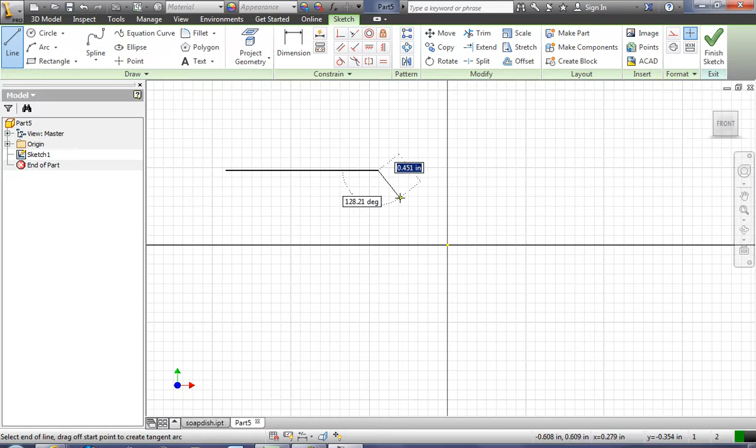So I'm going to draw a line that will simulate a golf club. That kind of looks like a golf club. Looks like a hockey stick too, but that's good enough for now. So there's my shape. Okay, I'm now going to finish my sketch, and in order to do a sweep, we have to have another profile that's perpendicular or at least intersecting this shape that would sweep along the curve.

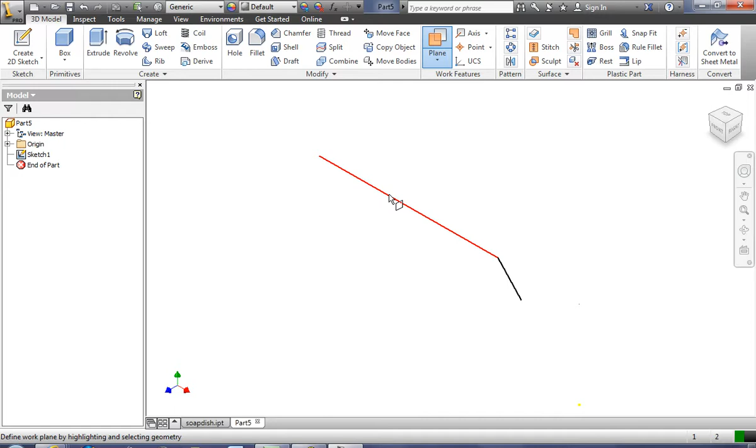What I'm going to do is make a new plane by using what's called a tangent work plane. We did it before when we made the plane off the soap dish to do the emboss. I want to select the line, and I want to select the endpoint. And what that does is it gives me a perpendicular plane to that sketch.

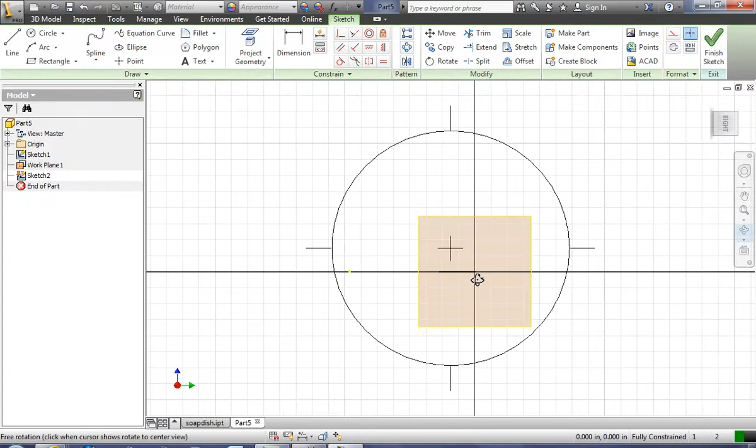I'm now going to make a new sketch on this plane. Remember, you've got to select the outside edge of the plane indicator. I'll make a new sketch. It turns to show me the sketch. Now I'm going to turn it sideways just a little bit so you can see that I've got the two different sketches. Here's the first one I made, and now I'm going to make a profile.

The profile is going to be the shape of a triangle. The reason we're using a triangle is because we want the edge to be sharp so that there's the least amount of contact with the ridge and the soap, so that it doesn't get all messed up when there's water at the bottom of that cavity.

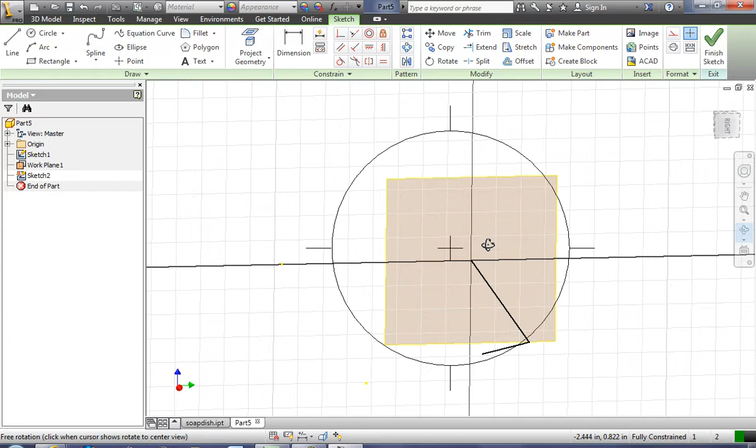All right, let's use the line tool, and I'm going to go ahead and make a triangle here. I'm going to start at the center, and make a triangle. Now this is 1/8 of an inch. These lines, these light lines, are 1/8 of an inch. So we'll go ahead and make it a little bit bigger than that. Maybe 3/16.

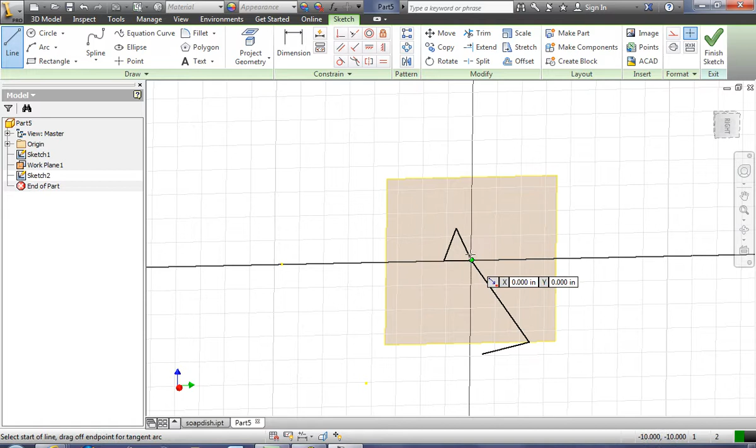There we go. Now I didn't dimension it, but I'm going to make this symmetrical by drawing a line from the midpoint of the bottom. There's the midpoint. Okay.

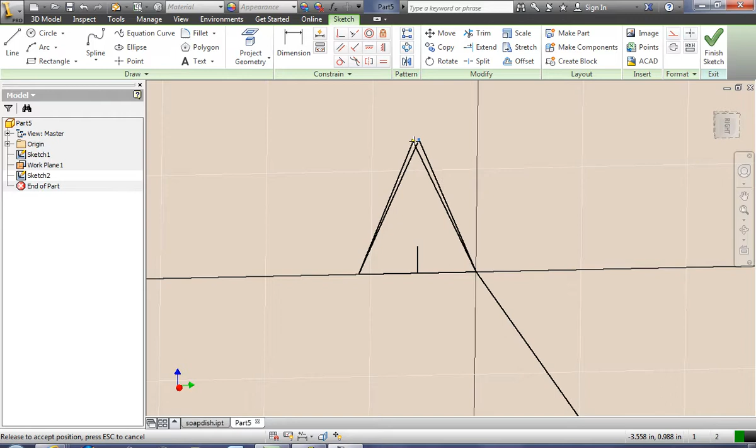Now that I'm out of the line tool, I'm going to go ahead and grab the corner or the apex of this place where the lines come together. And because it's not dimensioned, I can move it freely, and you can see that it will line up with that line. I want to be right in the middle, and that means that because that line is drawn from the middle, that is an isosceles triangle that is symmetrical, these distances are equal.

Okay, I can delete that line. I'll go ahead and finish my sketch. And now you can see what I have is an enclosed area and a sketch that I can then sweep that profile over.

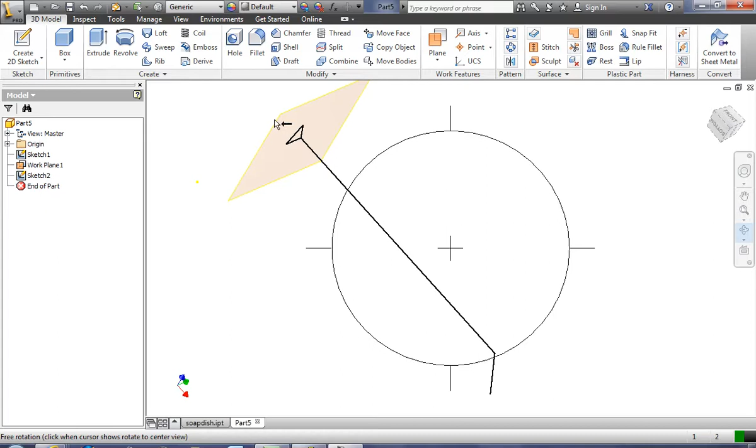And we do that by selecting the sweep tool. Now, if you hover the mouse over sweep, it will tell you and show you a video of how to do this. Let's go ahead and watch it. There's my path, there's my profile, there's my sweep. You have a perpendicular plane that intersects the path. Okay, you can see how that works.

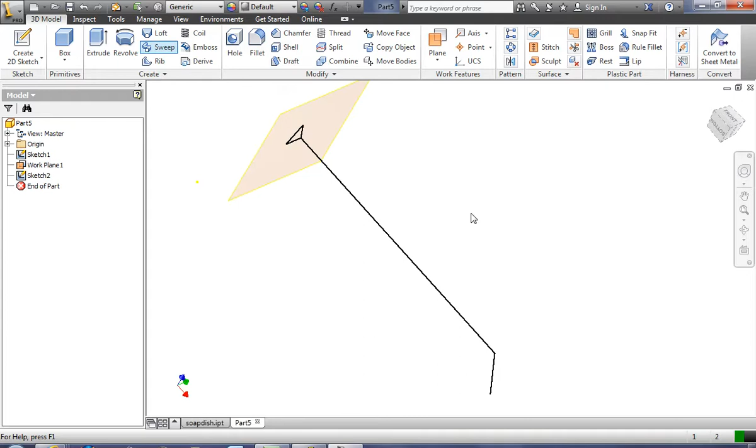All right, so we're going to select sweep. The profile is automatically selected for us. If there are multiple profiles, it would ask us to select one. The path indicator is here. It wants me to select a path. Well, the path is the first sketch I made. And there's the preview of what it's going to give me, and voila, there's my golf club.

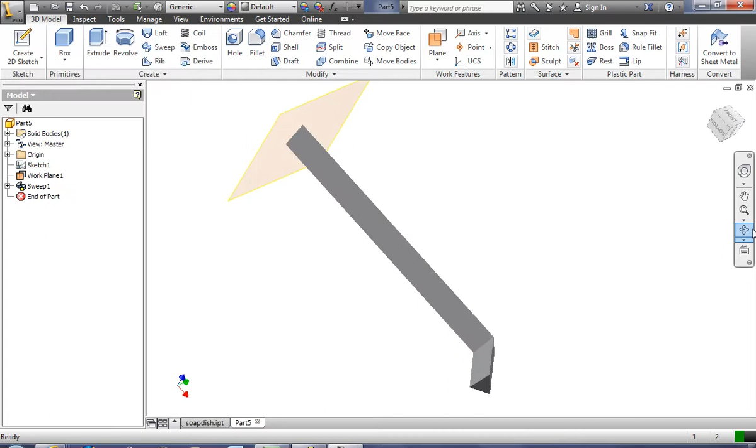Now, what I want you to do—you'll notice that I did this on a different file. I'm going to jump back over to my soap dish now. What you will need to do, and I'm going to walk you through it, I'm going to explain it, but you're going to have to do it. I'm not going to show you. You need to make a work plane.

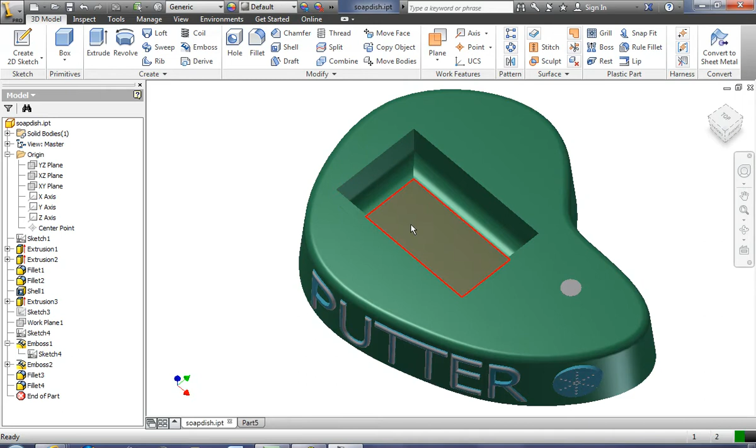Actually, you need to go onto this face, draw your sketch that you want your sweep to cover. You then have to make another plane at the end of that sketch. You make a new work plane, just like I did here, on the end of that path, and you draw your triangle. Keep in mind the size, don't make it too big, don't make it too small. Then you have to perform the sweep command by taking that profile and sweeping it along your path.

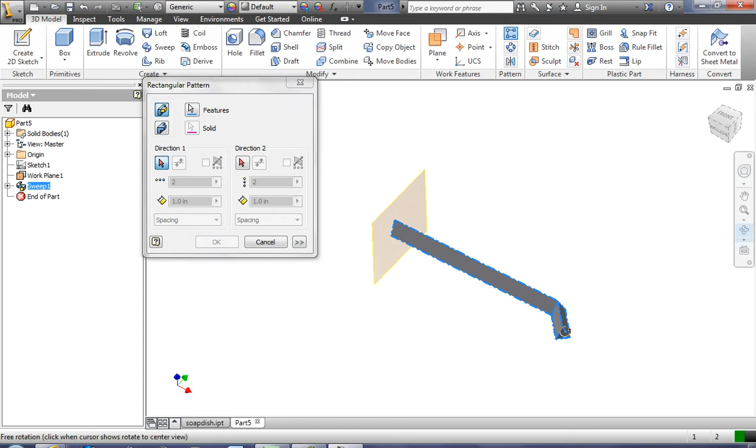It's that simple. And then when you're done, we're going to do a rectangular pattern, so you can imagine this at the bottom of my soap dish. If I come up here to rectangular pattern, I'm going to select that feature, and it's going to want me to select a direction. I'm going to pattern it in—let's see, I can select any line. I'm going to select this line right here. It's going to go in this direction, and you can see how you can get multiple parts.

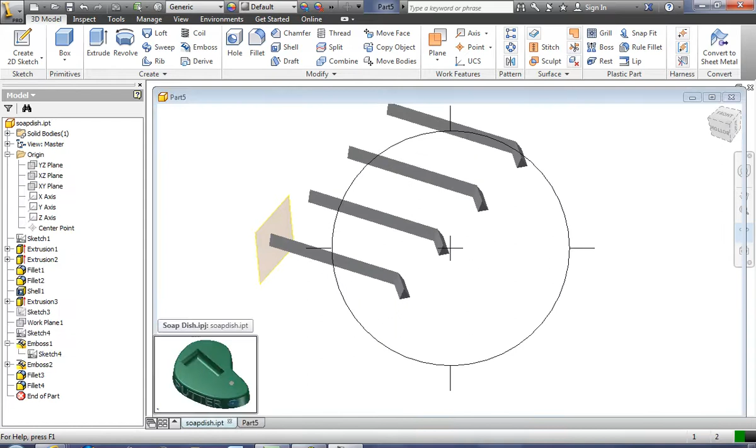Let's say I want 4 of them. I'm going to fit them in within a 1-inch area, and voila. That's how you would put multiple. You could imagine on my soap dish multiple golf clubs stretched over along this.

So that's what I want you to do, and with that, you're going to finish your soap dish model. When you're finished with that, I want you to upload your IPT. Save it. I know you did a preliminary one, you did a progress one, and now you're going to do a final. So when you're all done, completely finished, you've got your sweep, I want you to upload your final IPT, and you'll get your final grade for your soap dish.

Then we're going to do a drawing where we'll learn some different types of views. We'll be putting some dimensions on there. It'll be your first dimensioned real drawing of a product. Okay, look forward to seeing your designs.